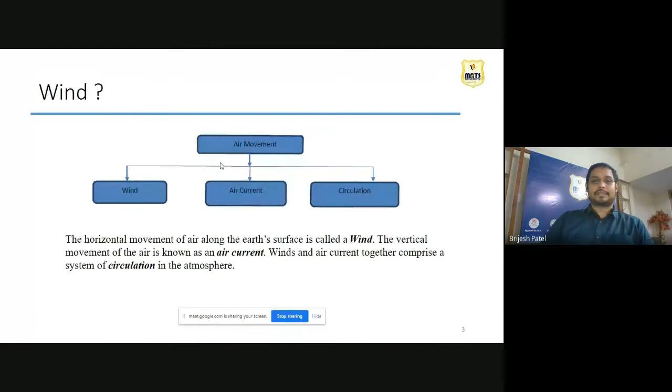Generally, trade winds blow from the subtropical high pressure belt towards the equator as northeast trades. Westerly winds, the second type, blow from the subtropical high pressure belt towards 60 degrees south and 60 degrees north latitude. The third is polar winds, from polar high pressure to subpolar low pressure areas. These planetary winds blow in the same direction all over the world throughout the season.

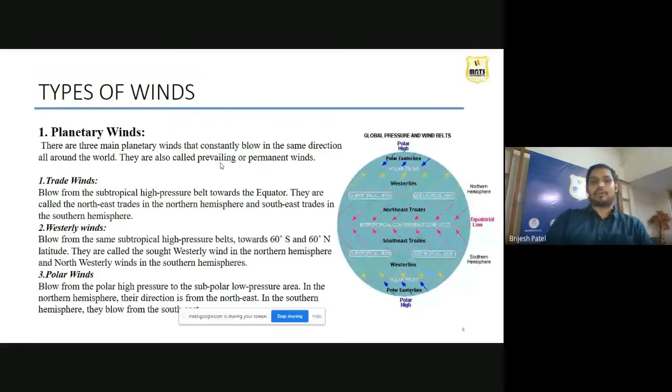The second type is periodic winds. These winds blow for a certain time in a certain direction - it may be part of a day or a particular season of the year. The first example is seen in seashore areas, where they have a sea breeze, with warm air rising. This is land breeze and sea breeze. This concept is periodic wind, occurring as part of a day.

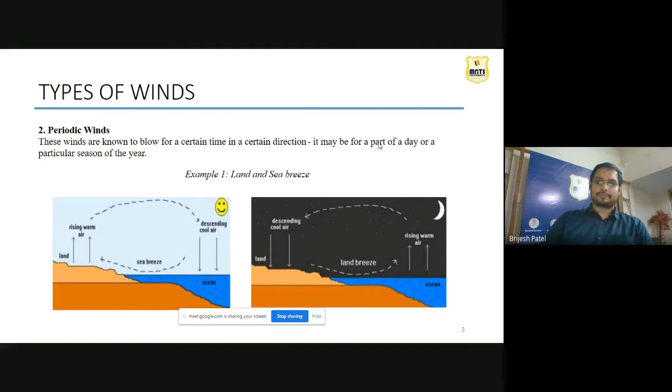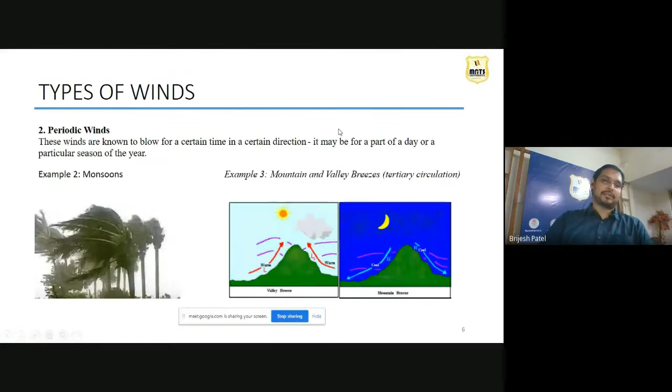Similarly, monsoons - periodic winds known for occurring as part of a year. Like monsoons, mountain and valley breezes occur where valleys and mountains have different wind directions and flows during daylight and night. So these are periodic winds which may depend on the day or throughout the season of a year.

The third one is local wind. This means some places, due to geographical conditions, have special local winds - hot wind, sea breeze, cold wind like mistral, northers. These are local winds, like in Rajasthan we call it the Loo, a hot wind that blows throughout the hot season. The Loo formation blows in hotter regions during summer seasons. So these are local winds.

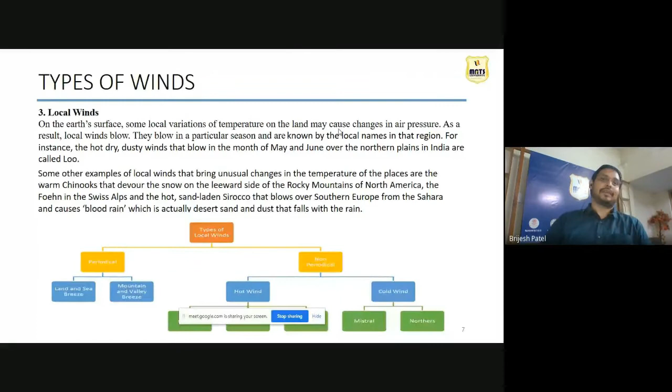In every area and region, due to geographical conditions or pressure gradient changes of that area, these local winds blow. So we have three types of wind: the first is planetary wind, the permanent wind; second is periodic winds; and third is local wind. These winds blow throughout the globe, and our ancestors thought of using this wind as a source of energy.

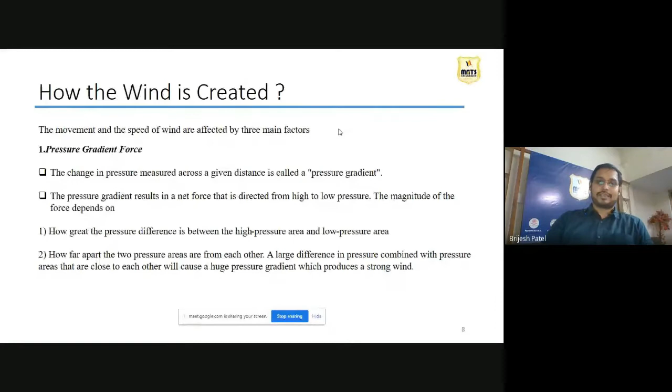There occurs a resulting pressure gradient force throughout the region. This creates the movement of air and the speed of the wind.

The second one is the Coriolis effect. Our earth is rotating, and many objects like airplanes, winds, missiles, and ocean currents get deflected due to this rotational surface. The Coriolis effect comes due to the Earth's rotation, and this effect also causes some of the wind.

The third one is the frictional force of the area. If wind is going on and it hits some buildings, it again creates a different force, and that causes, again and again, the air to keep blowing through it. So it also creates wind.

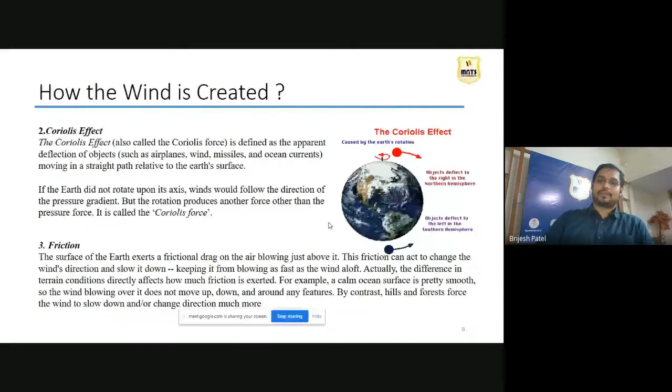Now you have already seen how the wind is created. Now we go for the wind pattern in India. In summer, the wind goes from the Indian Ocean to the north side, and in winter, it goes from the north side to the south side. This is the wind pattern in India.

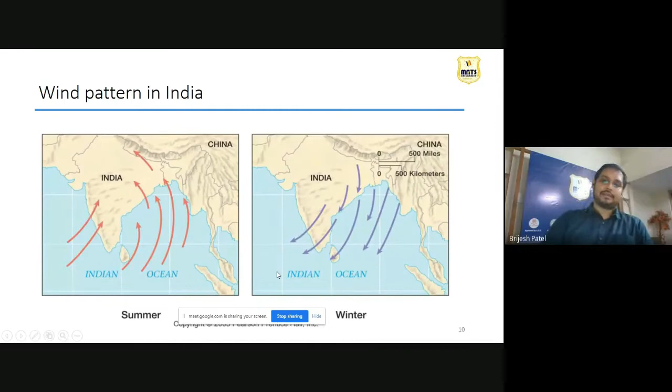What is wind energy? Wind energy is produced by the movement of air and converted into power for human use. Wind has been a source of energy for more than 1,000 years, but was replaced by fossil fuels. Much of the 20th century, today wind is making a comeback as a source of electricity and power.

Our ancestors always used wind energy to grind grains and to take water from wells. Many of these things they were already using, but when fossil fuels came into existence, they stopped using that. Now fossil fuels are going out of existence again, so we are again using the same wind energy, and many developments have come to use this wind energy.

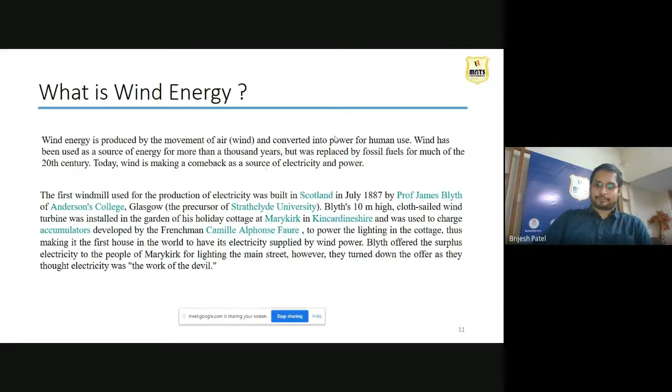Now, the wind energy conversion systems. There are two systems. One is the windmill, which is a mechanism that converts wind energy directly into mechanical energy, such as for milling grain, pumping water, or other general purposes, as we can see in the farms.

For pumping water, we have started a project, one of my PhD candidates is doing it. We are trying to find a solution because many wild animals come looking for water in the summer. So what they do is go to the place where water is available, and hunting of many animals takes place there.

So we can place small wind turbines in jungle areas and make a well, so that water can be available in the interior. Then animals won't need to move here and there in the summer season to find water. So we have developed this type of system in the jungles of Chhattisgarh, where many hunting trips take place.

So the first one is the windmill, and the second is the wind turbine. Wind turbine directly converts wind energy into electrical energy through electrical equipment and stored batteries, and it is transmitted through the power line.

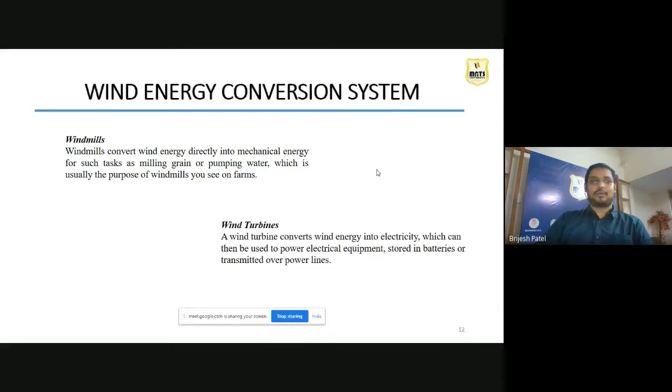Now we move on to the history of wind application. Wind energy has a past history. From about 4000 BC, the Chinese were the first to attach sails to primitive rafts, according to oracle bone inscriptions. Ancient Chinese scripted on turtle shells in the Shang dynasty from 1600 BC to 1046 BC. These ancient Chinese characters meaning 'sail' often appeared in the Han dynasty.

They used cloth and moved their ships by sailing towards the seaside, with multi-sail junks also going to the South Sea, carrying approximately 700 people with 260 tons of cargo. In early ages, when most technological development and turbines were not there to propel ships like we have in recent days, wind energy applications existed over a large area and from a long time in the past.

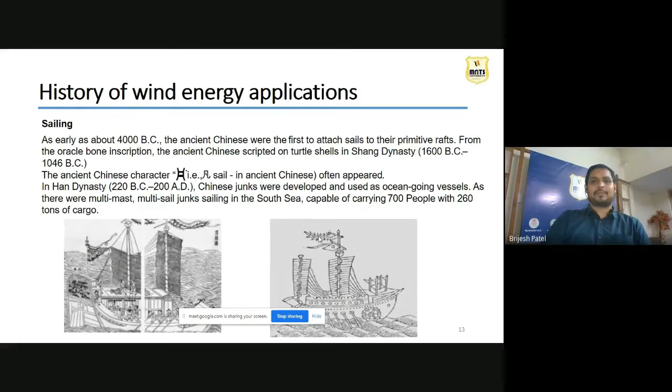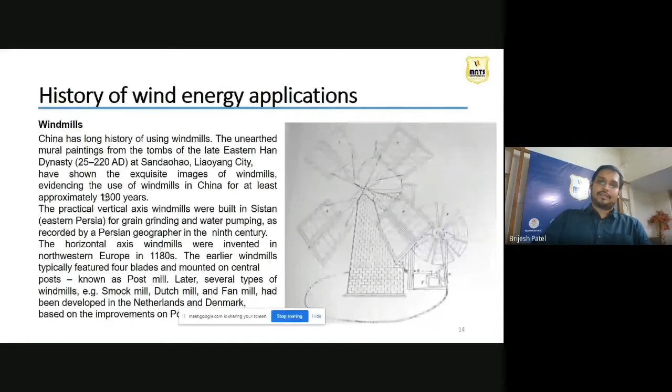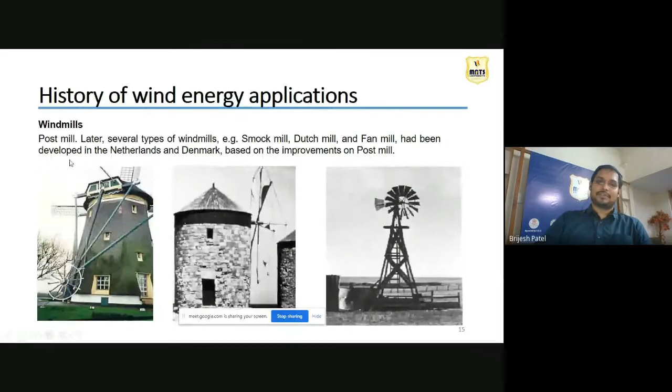The past windmills included the post mill. This first picture is of the post mill, smock mill, Dutch mill, and fan mill. These were developed in the Netherlands and Denmark, based on improvements of the post mill. These are the ancient windmills which have already been developed and named.

Now history of wind energy. Those windmills were used for drawing water or milling grains. But what about energy? When did we start generating electricity from the windmill?

This picture shows the first windmill or wind turbine in the world, designed by Charles Brush in 1888. It had 144 cedar blades with a 17 meter diameter, and it generated a peak power of 12 kilowatts to charge batteries that supplied DC current to lamps and electric motors. This was the first wind turbine, developed in 1888.

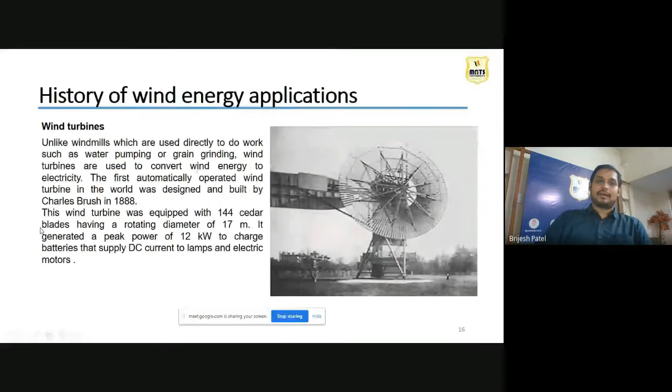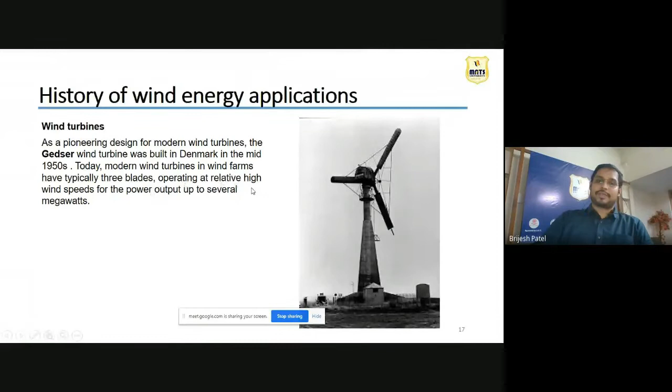So the history of wind energy applications runs from Charles Brush's design in 1888 to the latest three-bladed wind turbine in the 1950s. From 1888 to the 1950s, 70 years, it took from that cedar blade wind turbine to today's modern wind farm, based on the concept of the Gedser wind turbine, which operates at relatively high wind speeds for power output of several megawatts.

One more interesting application I found was Hero's wind power organ. This is a music instrument that was played using wind energy.

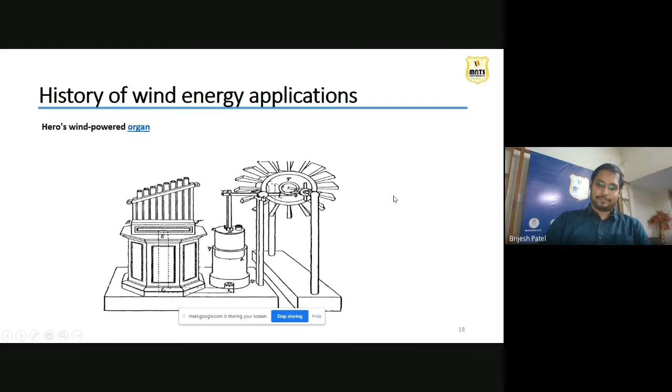Now we come to the latest wind turbine techniques. What are the types of wind turbines? We've already discussed what wind is, and the history of wind and its various capabilities over the last 2000 years. Now we will discuss the types of wind turbines. All faculties must already know various types, but we'll go through details of how they're created and their applications.

We have two types of wind turbines: the vertical axis wind turbine and the horizontal axis wind turbine. In India and in the world generally, we use the horizontal axis wind turbine in most cases.

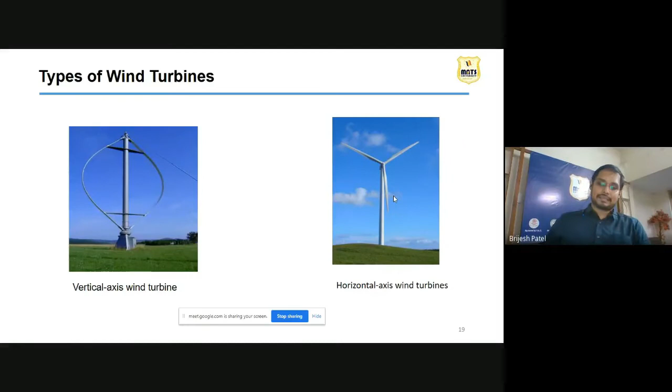Horizontal axis wind turbine: a wind turbine in which the rotor's rotation is parallel to the wind stream and the ground. All grid-connected commercial wind turbines today are built with a propeller-type rotor on a horizontal axis. These turbines have the main rotor shaft and electrical generator at the top of the tower, and may be pointed into or out of the wind. Small turbines are pointed by a simple wind vane, while large turbines generally use wind sensors coupled with a servo motor. Horizontal axis wind turbines are subdivided into upwind and downwind wind turbines.

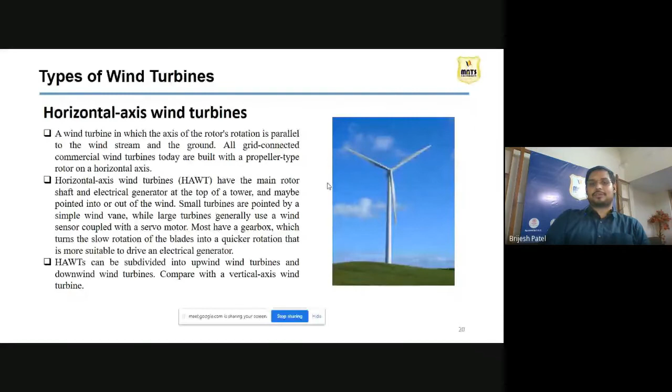So these are horizontal axis wind turbines, where the axis is horizontal to the rotor's rotation. The second type is the vertical axis wind turbine. Here the axis of rotation is vertical from the ground, so it is perpendicular to the wind stream and the ground. In a vertical axis wind turbine, the main rotor shaft is set vertical, and the main components are located at the base of the turbine.

Generally, vertical axis wind turbines fall into two categories: one is the Darrieus turbine, which uses lift force, and the other is the Savonius turbine, which uses drag force. Neither type is widely used today because vertical axis wind turbines are mainly for research purposes. We have seen many projects where vertical axis wind turbines are installed in road dividers, where cars moving produce frictional air that drives them.

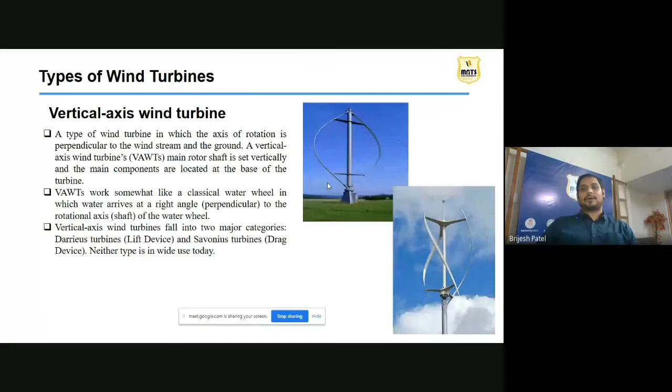That air rotates the vertical axis wind turbine. But it's only used for research and development because the costing is high and the power output is low for the vertical axis wind turbine.

Now we'll go to the wind turbine mechanism, that's how wind farms are developed. This is a special three-bladed wind turbine.

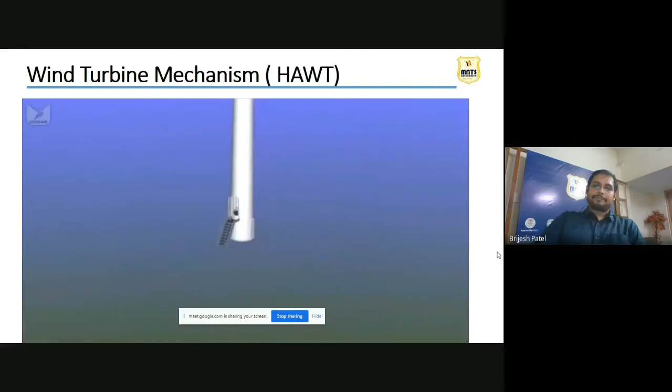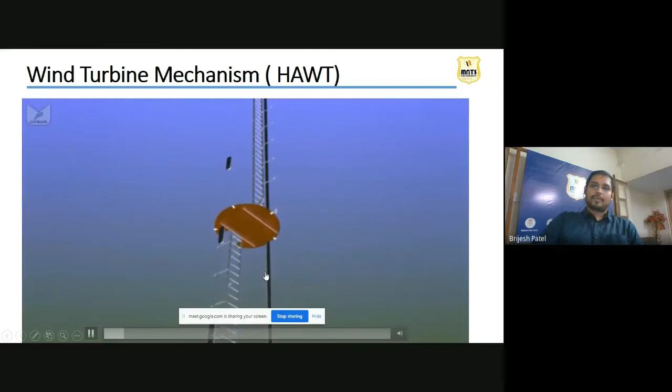In the base of the wind tower, here are your conventional supply boxes or the battery systems which can store the energy. These are the staircases for moving up to the top for maintenance purposes.

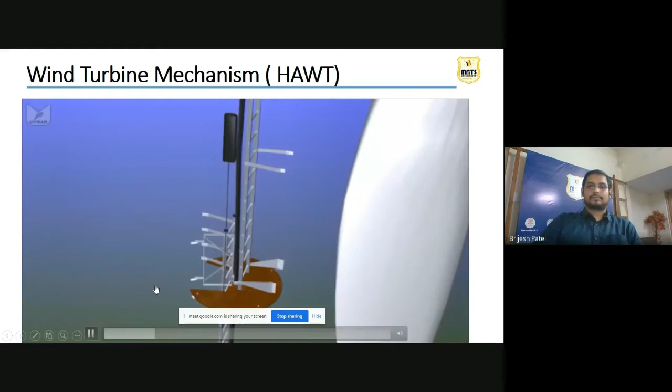It is a backside generator for the wind turbine, which has a generator and a motor to rotate the shaft. And this has the yaw mechanism - if we go to the back, this is the yaw mechanism.

Here is the yaw mechanism also, so that if wind direction changes, we can change the turbine direction. This is called the yaw mechanism for the wing. We can also change the blade pitch angle of the blade.

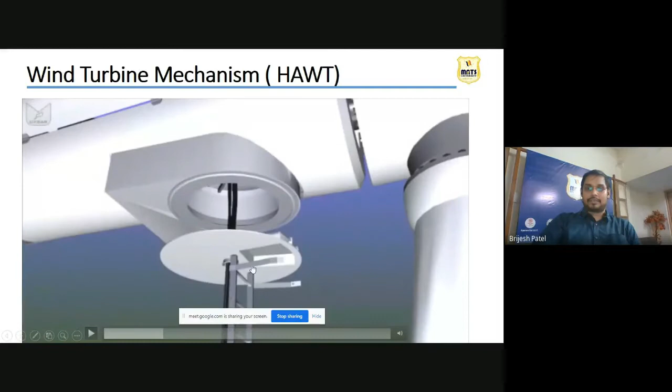In the next slide, we'll see how blades create the wind energy. This is a general description for it.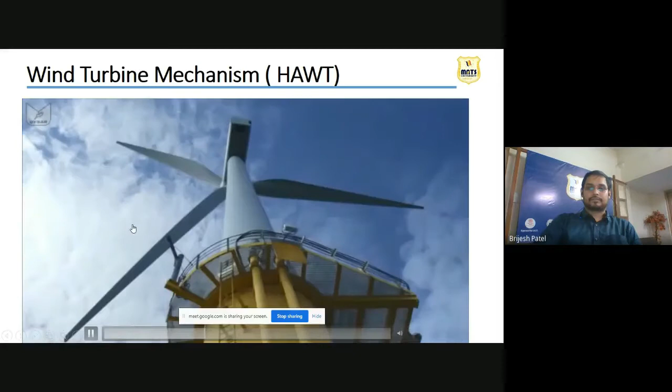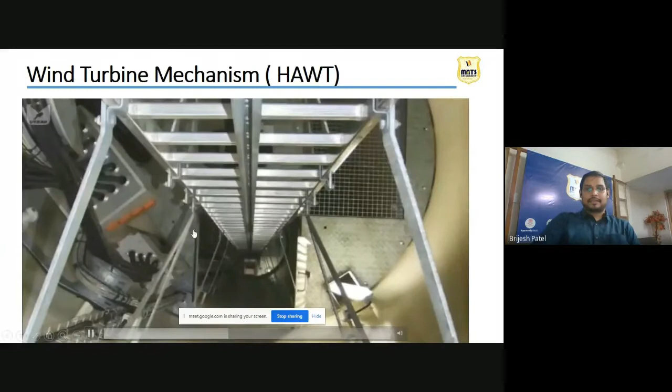Constantly nowadays these towers are having a multi-story system, and most of the batteries are stored inside also.

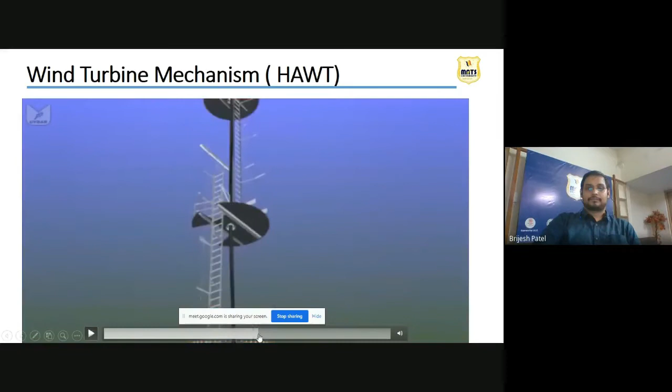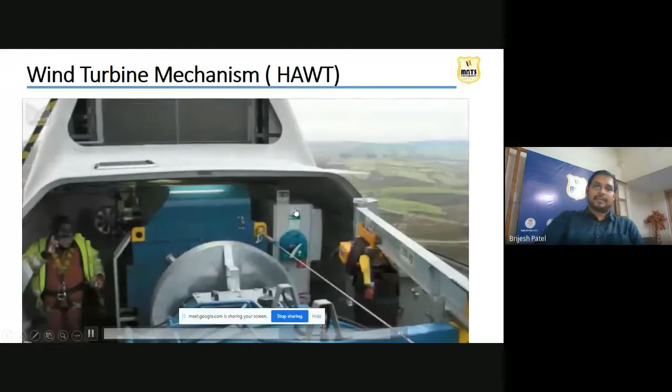So the pictures are showing the maintenance being done at the wind turbine.

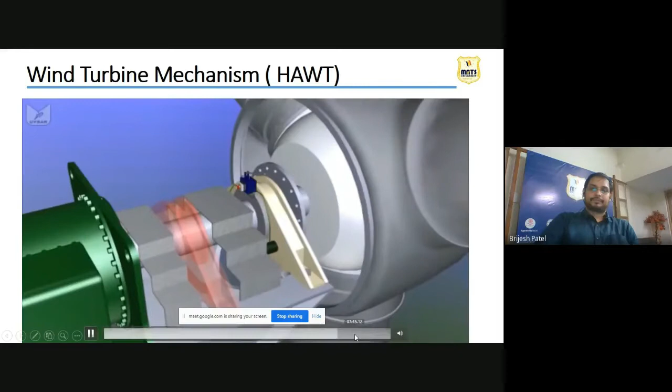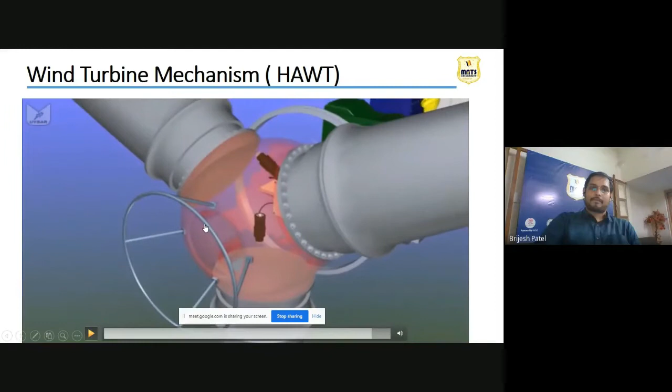That was the mechanism for the wind turbine, as we have seen in the picture and in an animated video - all the parts of the wind turbine.

Now let's go for the vertical axis wind turbine. It's having blades of aerofoil shape with a strut. The shaft is connected, and downward the generator is connected.

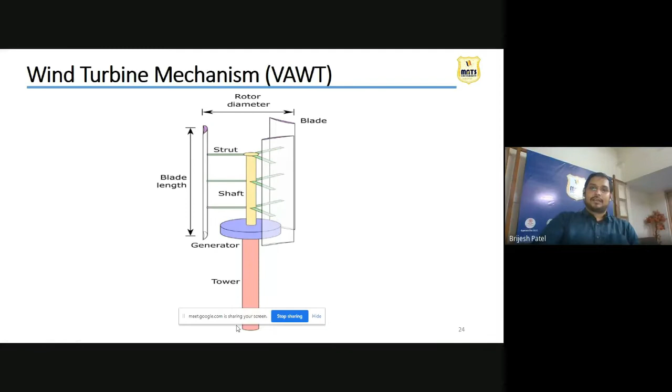As we understand the structural form of the wind turbines - these are both the slides showing the structural form of the wind turbines. But you know, from the rotation of the wind, we will get the energy.

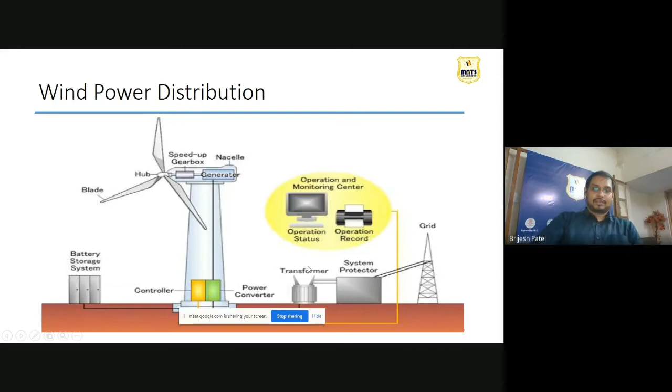How the wind energy power is distributed from production to the end user, and what is the latest technology of power distribution?

Many times this wind energy - the wind is not blowing from 5 o'clock to 8 o'clock. Then what happens? It cannot give direct supply to the grid.

So nowadays what they are doing is making a battery storage system, from where we can continuously supply to the grid from various wind farms.

Nowadays, it's not a standalone wind system, it's a wind farm. Many wind farms connect to battery hubs, and they can directly supply to the grid from that hub. So we are having a channel of wind farms.

Now the concept of a single windmill wind energy system is not there anymore. It's the concept of wind farms, like in solar also, where we have a solar farm which can continuously produce energy.

So here also wind farms are located - this is the concept of wind farms. All the wind farms come to the hub, and from the hub it is directly supplied to the grid. So the yellow lines show how the energy is supplied.

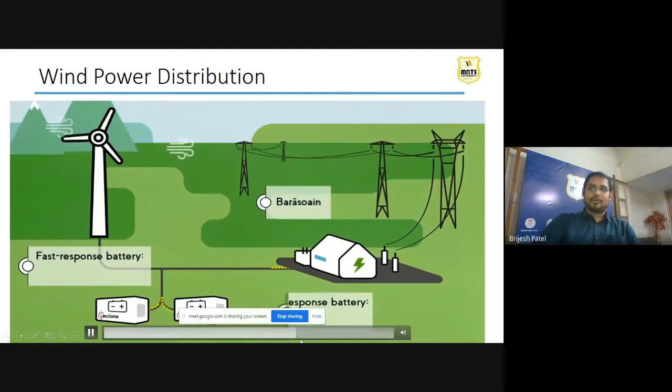As industry wants more voltage, how can you provide that? Here fast response batteries and slow response batteries are installed as a backup system. These give additional energy to the supplies. When the wind is low or high, energy is stored, and if industries need additional energy or high voltage, the battery directly supplies that energy. So nowadays the system has changed. It cannot give directly to the load, but gives a continuous supply of energy to the wind farm.

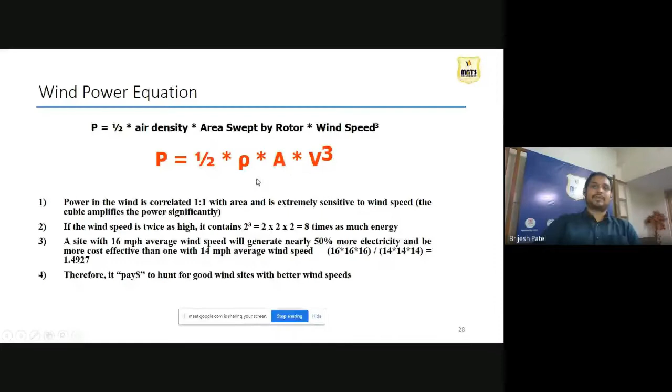Turbine output drives wind economics, and output is a strong function of wind speed. As wind speed increases with height above the ground, power equals half air density times area times wind speed cubed. When height increases, wind energy also increases, because at ground level there are many obstacles and wind is blocked. That's why wind mills or wind turbines are placed at a very high height.

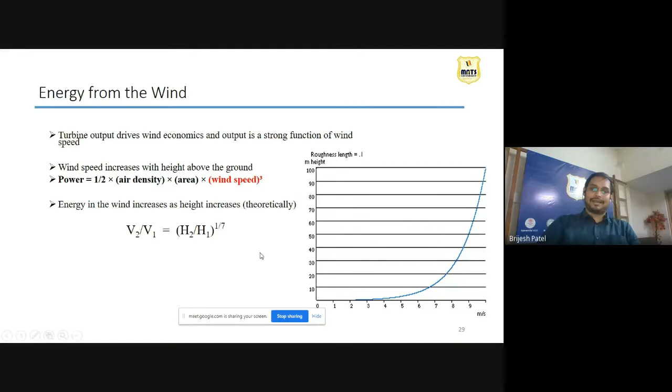Now we go for the aerodynamic performance of the wind turbine that we want to study. What are the design aspects of it?

Wind turbine design aspects: we have three design aspects for the wind turbine that we should know to design one. The first is the aerodynamical performance, the performance of the blade of the wing. The second is the mechanical strength criteria.

Many times there can be high wind blows in some regions. We have already seen that roofs of some houses have been taken out by this. Because it is a natural phenomenon, we cannot assume whether high wind will occur or not. We cannot know that this time it will happen, but we cannot reinstall or dismantle our wind turbine and keep it safe every time. So the mechanical strength criteria should be high.

And the third one is the economical aspect, because each and every design, each and every thing depends on this economical aspect.

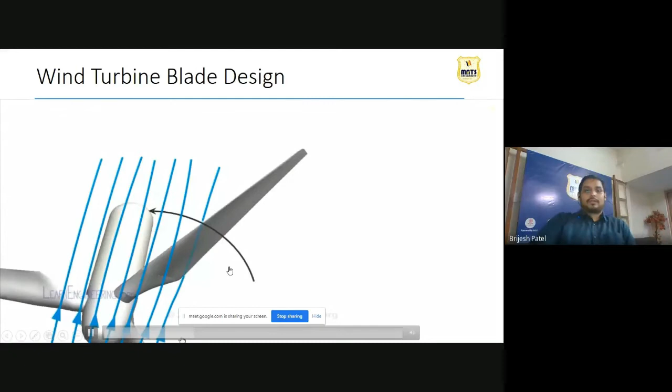This is the wind blowing from a certain direction. The wind blade has been designed by bifurcating it into small aerofoil sections, like an aircraft wing also has a small aerofoil section. These aerofoil sections create lift, and this lift makes the blade move forward and rotate. When it rotates, it converts into electrical energy through the generators placed at the top or end of the turbine.

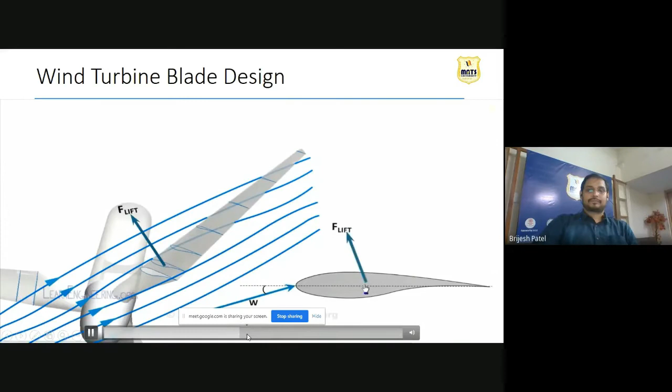The lift force created also has a tangential drag force. As we know, there is the angle of attack - the angle created between the stream normal line and the wind striking line. Whenever the wind strikes, this angle is your angle of attack.

If we increase the angle of attack, the lift will also increase, but only up to a certain parameter. Because if we increase the angle of attack more, it will go parallel to the wind flow direction, and then there will be no lift created, so there will be no movement of air.

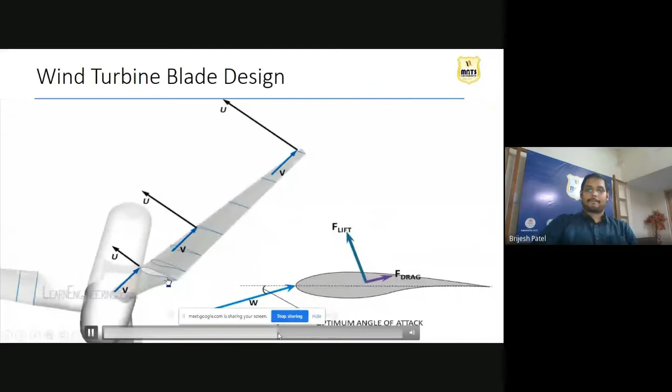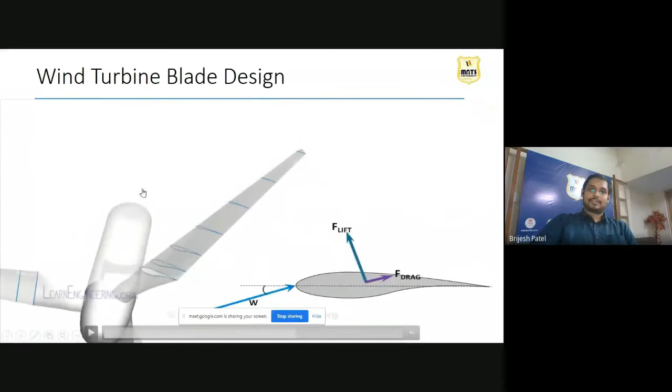Achieving optimum angle of attack across the cross section requires continuous twisting, because all the aerofoil sections have different angles of attack. So what the designers have done is twist the blade, so that everywhere the angle of attack is the same. If the wind changes its direction, the blade will continuously follow it and keep giving the rotational effect.

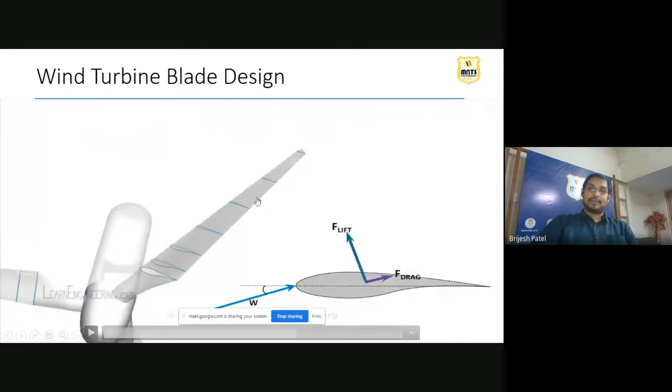That's why nowadays wind turbines have a pitch control mechanism - the blade can change its pitch. If we change the pitch, the angle of attack also changes at each section. This gives another criteria to fulfill in order to get maximum efficiency.

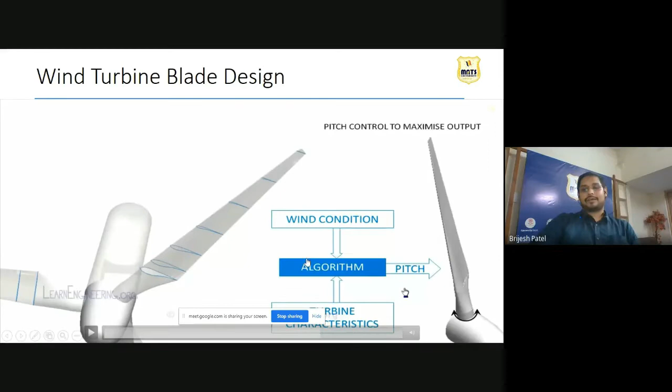Many algorithms are presently being developed for changing pitch according to the wind flow direction where the turbine is installed. For a wind farm, they study a year's database of how wind conditions flow throughout the year, checking these conditions before installing the turbine, and then make an algorithm to change the pitch. If the wind blows in another direction, it will automatically change its pitch. So software engineering is now also playing an important role in new wind turbines and renewable energy sources.

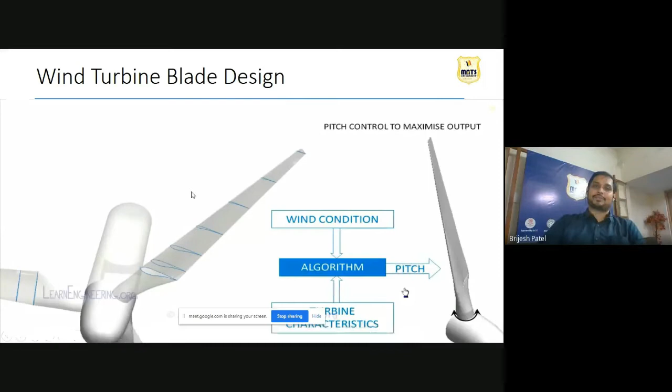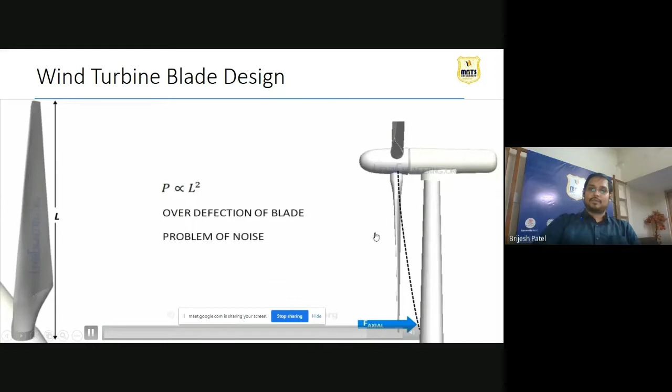The third parameter is the blade length - as length increases, it is directly proportional to power. We cannot increase the length too much because over-deflection of the blade occurs, along with noise problems. Also, as we increase blade length, we get more power, but there are problems of investment and transporting the blade from the manufacturer to the location, which is also a huge task.

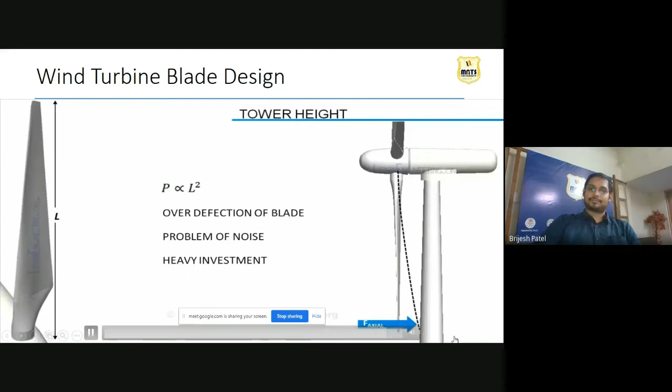Tower height also plays an important role in power output, because as the tower height increases, we get cleaner and more efficient wind. If the height is not sufficient, the wind passes through trees or other obstacles and loses energy. So the high-energy wind loses its power, and when it strikes the blade, it gives very low power or low rotational speed.

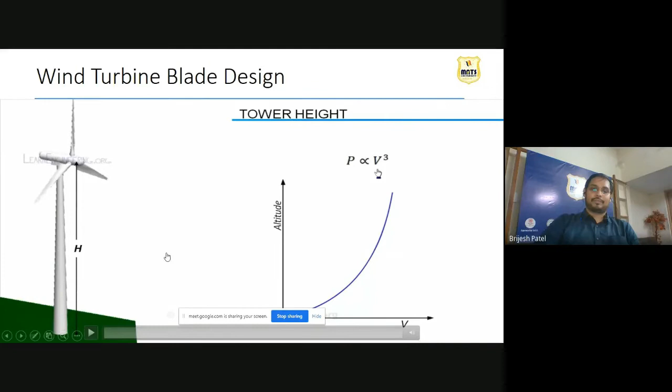Now we have gone through the design aspects of wind turbine: aerodynamical, efficiency, and economical. This includes blade length, height, pitching of the blade, and implementation of software algorithms for auto pitching. Now we'll go through how this wind turbine creates energy, and on which law.

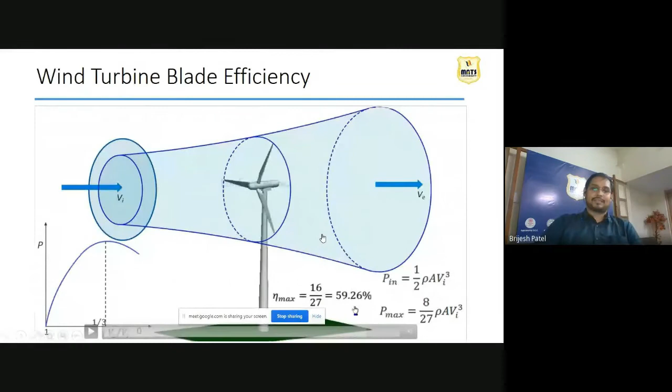So the efficiency, output by input, when we divide these two equations, gives 59.26%. This is the maximum efficiency for a 3-bladed wind turbine in the ideal case, because many assumptions are taken here: that this is a disc, meaning it has an infinite number of blades. With these assumptions, we get 59.26% as the maximum efficiency of a 3-bladed wind turbine. This law is known as Betz's law limit.

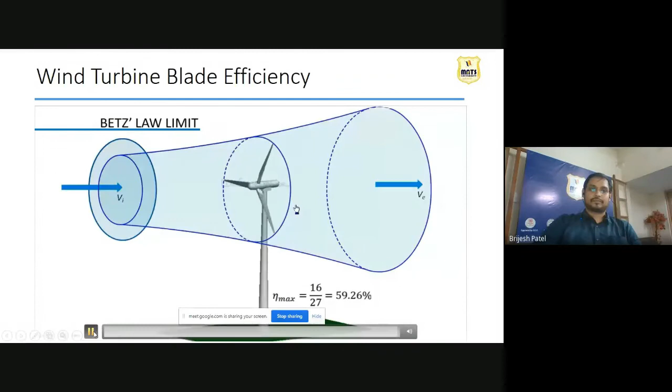Now I think you understand the concept behind the wind turbine, how it flows, and what is the maximum efficiency of a wind turbine and how it is calculated.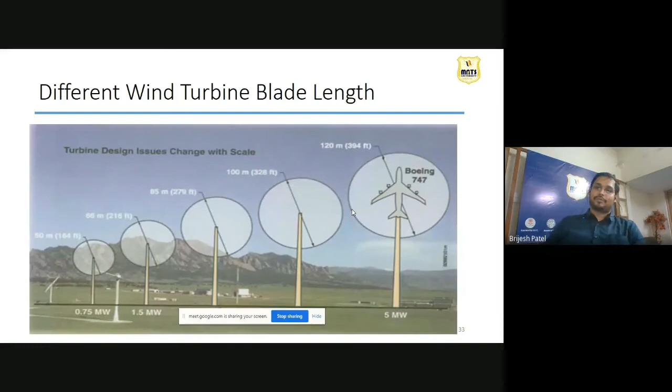This might increase in the next 5 to 7 years, going to 180 meters—already in process—then 200 to 300 meters, allowing us to get a power output of 10, 15, or 20 megawatts in a single wind turbine.

And how the wind energy saves the environment. Energy use in power plants accounts for 67% of air emissions of SO2, the primary cause of acid rain. SO2 causes acidification of lakes, damage to forests and other habitats.

So if we go for wind power, or renewable sources of energy, this percentage will be 0. 25% of NOx, which causes smog and respiratory ailments, will also be reduced if we account for industrial waste calculations. 33% of mercury will be less, going to 0 if we go for wind energy.

So it saves a lot for the environment, it saves a lot for the future. It's not just that we go for renewable energy sources because fossil fuels exist, but also to save the environment from these elements created by our power plants and industries. So if we go for clean energy, we can bring this percentage down to 0. We don't want this percentage, it is not good for human health.

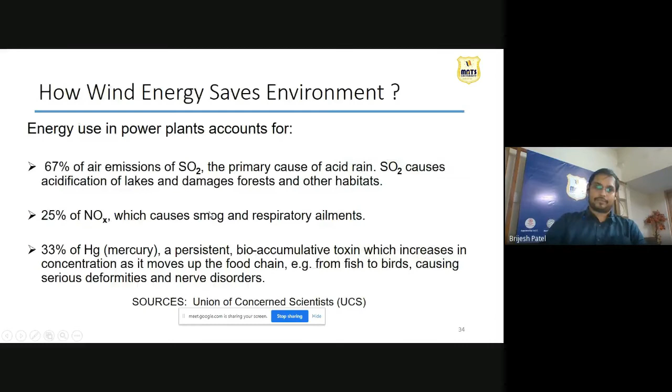So wind energy benefits are: no air emissions, no fuel to mine or transport, no cooling water, no water pollution, no waste. This is clean energy, because once we install it, we install and forget. Only the maintenance part is there, some maintenance thing is there. We have installed one thing.

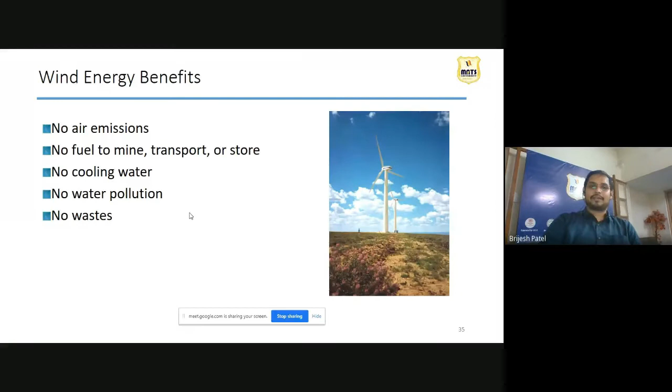When the blade is hit by birds, that causes many issues. This is again a conceptual and design aspect, because nowadays these blades are manufactured of composite materials, so birds hitting them gives damage to the blade. And if a blade is damaged, the turbine will be unbalanced. So again it has to change the blade or repair the blade, but then it still gives a long-term benefit.

This is a slide from 2016-17 showing wind energy installations in India. Up to 2002, we only had 1,666 megawatts installed in India. But by 2016-17, the graph goes to 27,441 megawatts - a huge development in India. As the installed capacity on 31/7/2016, over the last 17-18 years, this was the development from 2000 to 27,441. So this was huge development in India, but it mainly happened in the last 5 years.

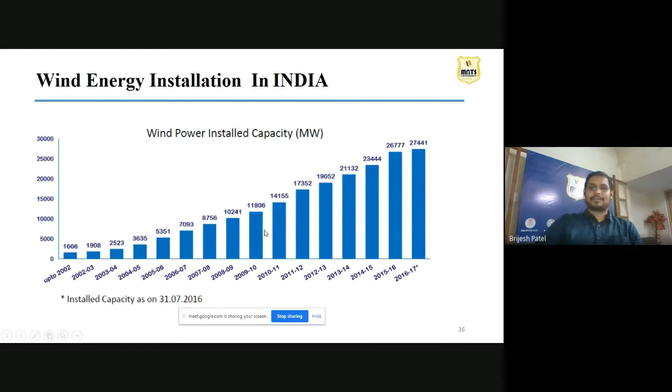So wind energy production in India according to states: Tamil Nadu is the highest wind energy producer, second is Gujarat, third is Maharashtra, then Karnataka, Rajasthan. These states have seen the potential of wind across their region. Every state cannot install wind capacity due to wind blowing conditions - otherwise they will install it, but they cannot get maximum output. So mainly these states have installed wind capacity.

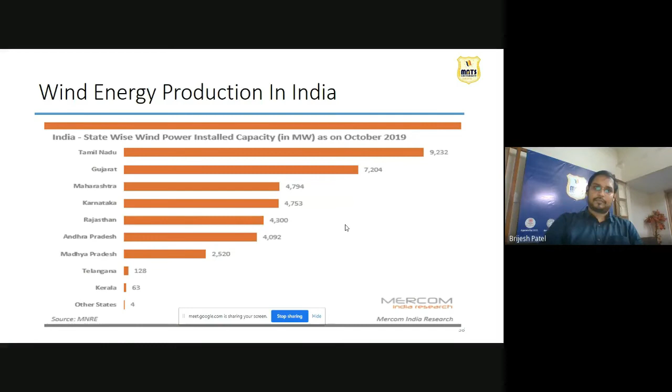The red mark shows the wind energy distribution across India. Wind energy utilization in India - generally Tamil Nadu is having 19.4, as we have already discussed.

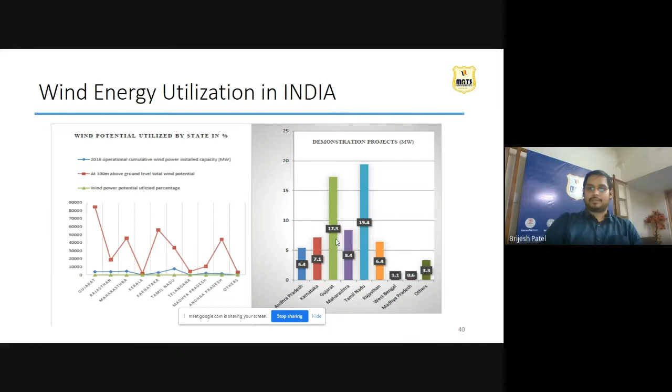But still, our mission continues. We have installed capacity of 65% of wind energy from renewable sources, yet in global wind energy production among top 10 countries, we are not standing there. So we have to do more R&D in wind energy, more database collection across various places of India, because many atmospheric conditions exist that we have not looked into till date.

So we know we will grow through this as fossil fuels are depleting day by day, and we have to save fossil fuels for future generations. So we'll start working on identifying every area where periodic winds or permanent winds flow, to get our name into global wind energy production.